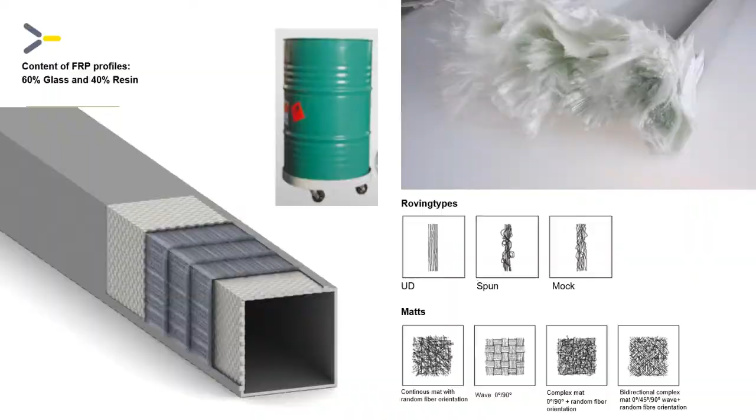At Fiberline Building Profiles, a profile consists of approximately 60% glass and 40% resin. The dry raw material is primarily glass, but it can also be carbon or aramide fibers. You can also use natural fibers such as wool and hemp. The wet material, or the resin material, can be either polyester, polyurethane, epoxy, or similar products.

If you look at the different glass types, UD is a unidirectional roving type and provides the strength in the longitudinal direction. The spun and the mock also provide strength mainly in the longitudinal direction, but also a bit in the transversal direction. The mats, seen at the bottom of the picture, are mechanically made, randomly oriented, continuous fibers. They have good all-round properties like transversal strength, stiffness, and bolt-bearing capacity, and give a high impact resistance.

All the construction profiles are produced with a surface veil for increased corrosion resistance, weather and UV resistance. The surface veil also improves the surface appearance.

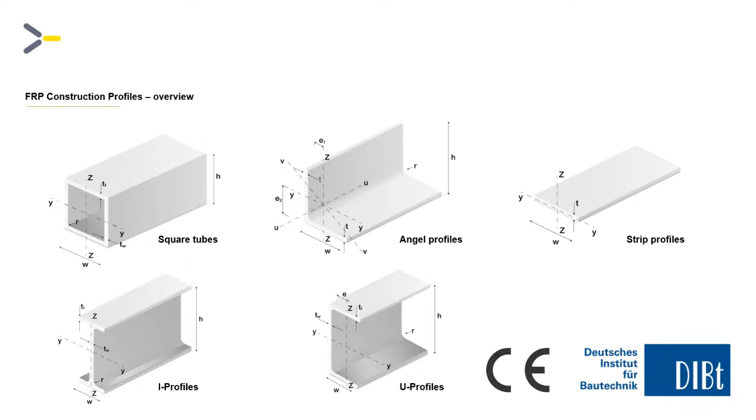You just need to log into the web shop, where you can also place an order 24/7. You can see your own order history if you are a customer here, save your favorites, and there are a lot more things you can do. If you're a new customer and working on a bigger project, you can also always contact our sales team before placing an order. Please use, if possible, our standard profiles as they are always in stock. Customized products and non-standard items have a minimum order volume that must be agreed with us before we start up the production.

But if you don't want to buy a complete bridge, we can also offer bridge decking planks, mainly for pedestrian and bicycle bridges. We keep the deckings in 6 and 13 meter stock. Planks can be supplied with anti-skid surface rated R10 to R13 according to the DIN norm, or a slip resistance value according to the EN norm. Planks are of course also available without anti-skid surface.

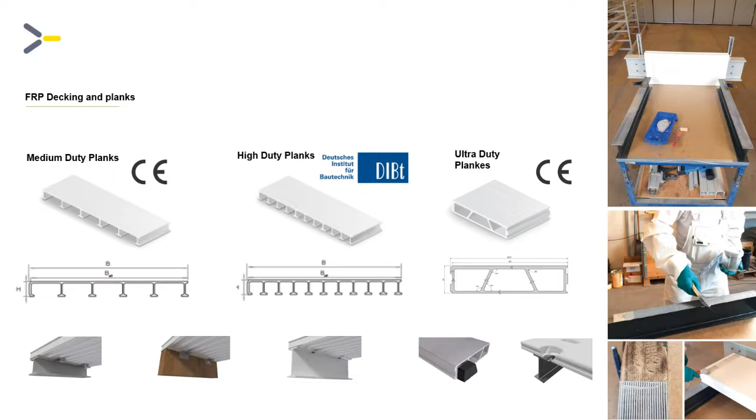In addition to all the construction profiles and planks, we also offer FRP gratings. For all our products, you can download brochures and load-bearing charts from our webpage. All the accessories here are also made in stainless steel.

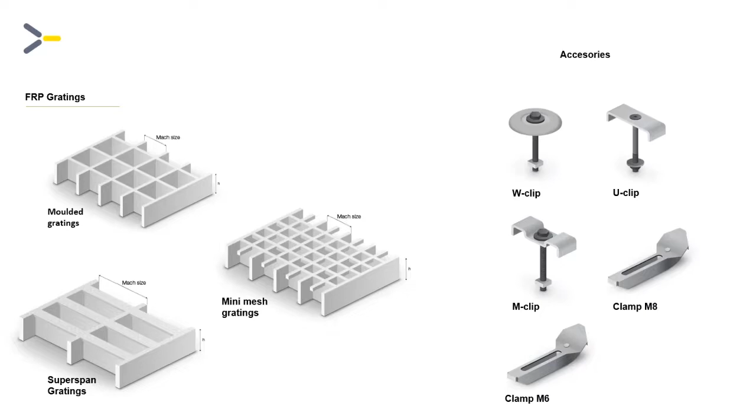Now we come to talk about different kinds of machining. Cutting. We can do the cutting for you, but if you want to cut the FRP profiles yourself, we recommend that you use a circular saw or a chop saw. We recommend the use of carbide or diamond tipped saw blades, and you can either use mobile or stationary systems.

Dust is not harmful from the cutting, not harmful to your body because of the size. However, we recommend that you use a face mask, hearing protection, and of course safety goggles. After work, you should wash your hands using only cold water, because the pores in your hands open up when you use warm water, and when the pores are open, small pieces of glass will get into the pores, which causes itching and irritation.

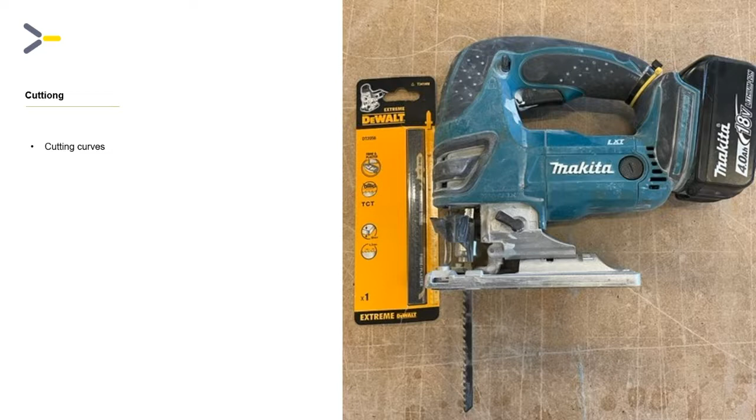A jigsaw equipped with a carbide saw blade for sheet metal work is very good for creating curves in the FRP profiles.

When we use our CNC machine for cutting, the optimal speed is approximately 60 to 80 millimeters per second, but a lower speed will of course reduce tool wear. For larger series, we recommend that you use diamond-tipped saw blades. We normally buy our cutting tools from a German supplier based near Frankfurt am Main, but I'm sure there are many other suppliers out there.

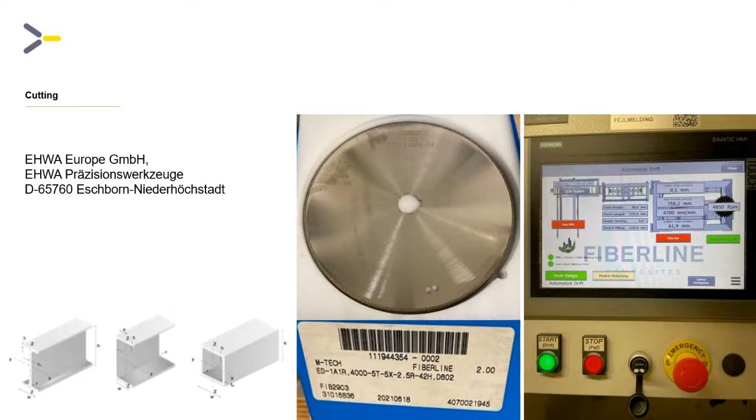Drilling. For smaller jobs, ordinary wood drill bits or hard metal drill bits can be used. For larger series, special drills or diamond tip drills are much better. We use normal machines such as cordless screwdrivers, but also column drills with a speed of between 1600, 3600 and 3900 revolutions per minute can be used. This speed gives of course burr-free holes on the top and on the bottom.

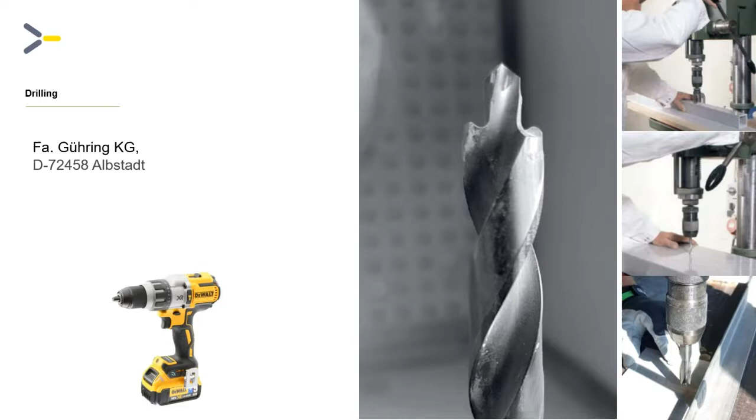We also use other different kinds of mobile drill machines, so you can probably just use the one that you already have in house for drilling.

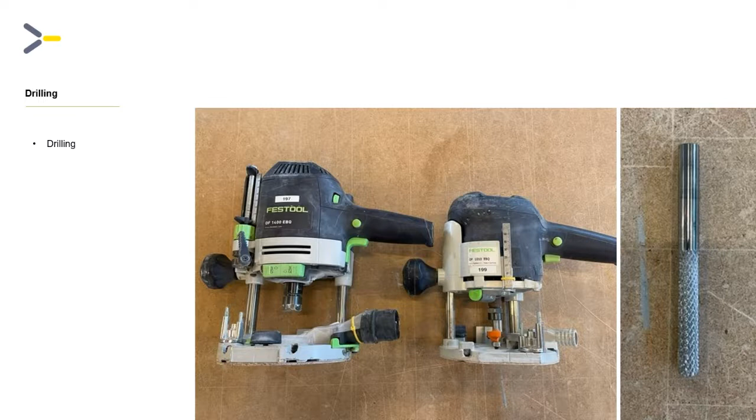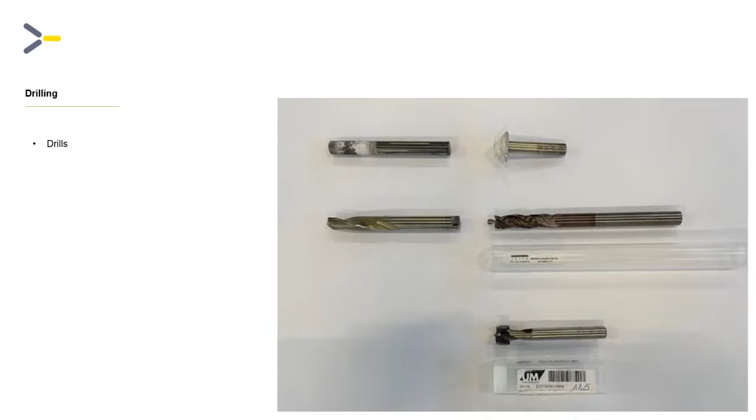For grinding the profiles after cutting, sandpaper or Scotch-Brite is suitable. A belt grinding machine with a high speed and a low feed rate is also perfect for larger series.

When we use our CNC machine for machining, for milling and drilling, we use carbide or diamond tipped tools. The rake angle should be between 5 and 15 degrees. Here you should pay attention to the feed rate. We use approximately 0.5 millimeter per revolution. Cutting speed up to 60 millimeters per second is optimal here. If we feed too much, the result will be worsened due to overheating of the material.

Punching the FRP profiles is also possible. A wall thickness up to 4 millimeters can be punched with normal carbide punches, but punched holes will shrink approximately 0.05 to 0.1 millimeter compared to the punch size. The cutting angle should also be flatter compared to steel, which leads to increased wear of the tool compared to steel. So punching is possible, but it's not the best solution.

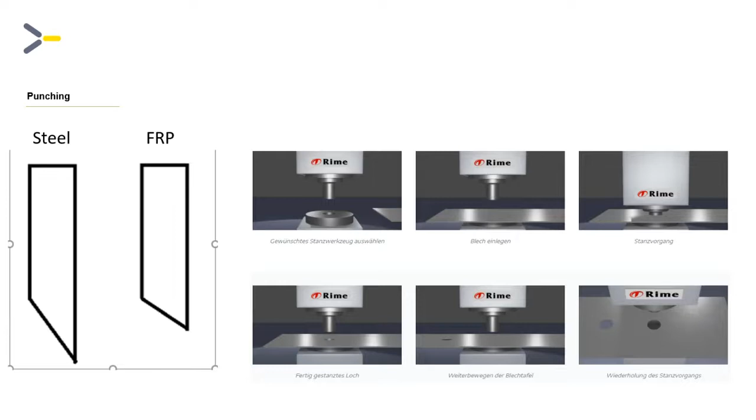Cut threads in FRP cannot withstand greater loads and are therefore not recommended. We have tried in many different ways, but the results have never been really good, so we recommend you use alternatives.

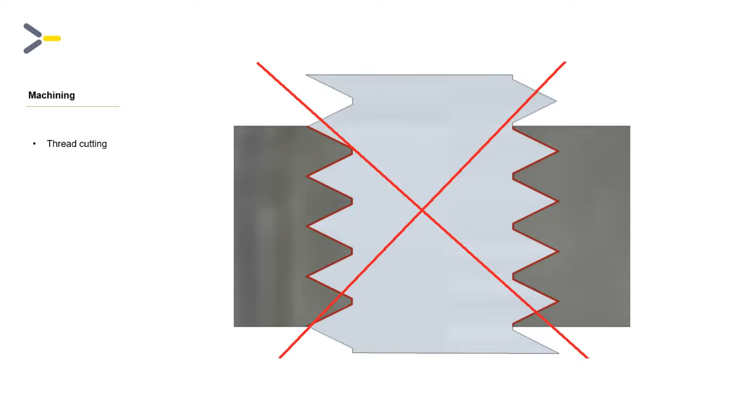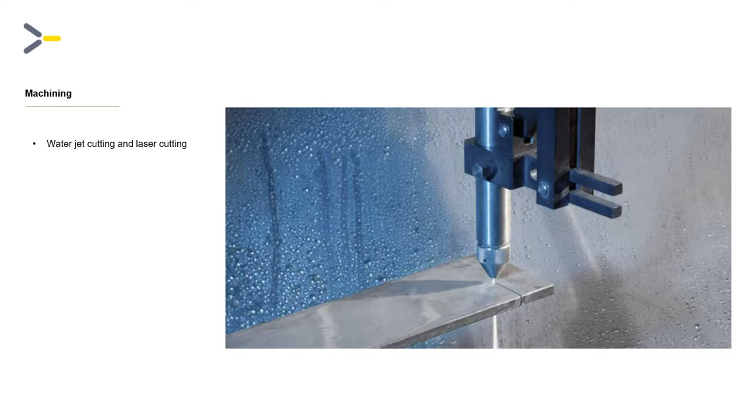Water jet cutting and laser cutting. Panels and solid profiles up to a wall thickness of 20 millimeters can be water jet cut. Laser cutting is also possible by using protective gas, could be argon. Pressure and speed must be much lower than for steel cutting.

Milling and turning. Carbide or diamond tipped tools should be used when turning and milling at the same time. The feed can be up to 0.5 millimeter per revolution and the speed up to 60 millimeter per second. The clamping angle of the cutting edge is between 10 and 15 degrees to achieve the best result. Depending on the tool, the cutting depth can be up to 10 millimeter. We learned in our own production that we get the best finish with rounded tool bits and either air cooling or liquid cooling.

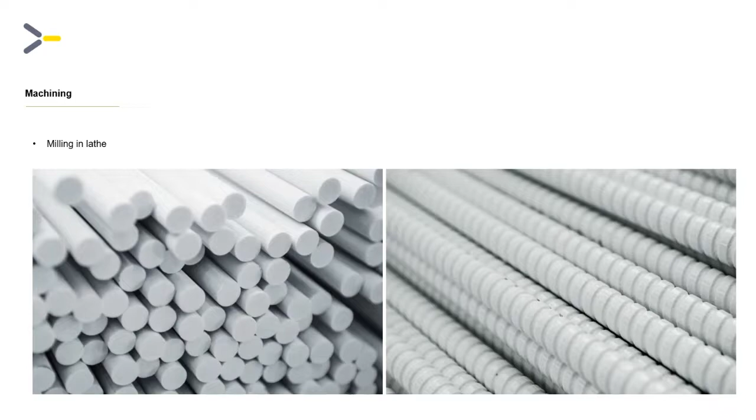Next we're going to talk about assembly. Bolted joints are used in many different applications, such as cooling towers, bridges, in the building industry, in the chemical industry, plant engineering, offshore installations, and of course railway platforms, stairs, and many more.

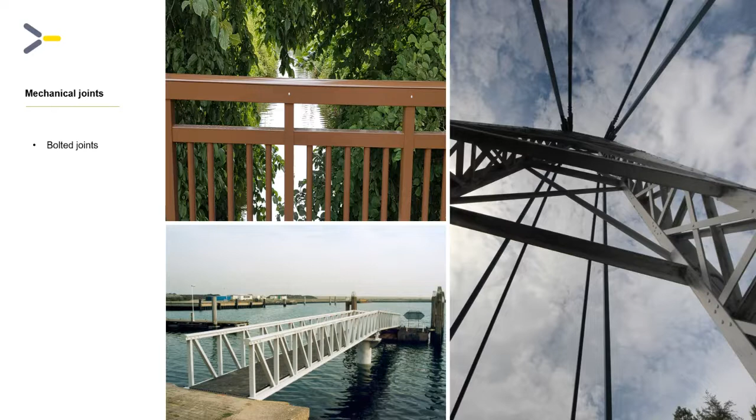In the near future, DB certificates will be required for assembled FRP profile constructions in Germany. However, there will still be a transition period for this. This will be regulated in the Deutsche Bahn standard and organized by the Academy for Railway Systems. In Denmark, we sometimes follow rules introduced elsewhere, but all load-bearing structures naturally require an approved calculation. It might be different from country to country, but you know best what the rules are in your own country.

Mechanical joints, machine screws and washers with self-locking nuts are recommended to be used here. If you want to dismantle screw connections, sleeves can also be used.

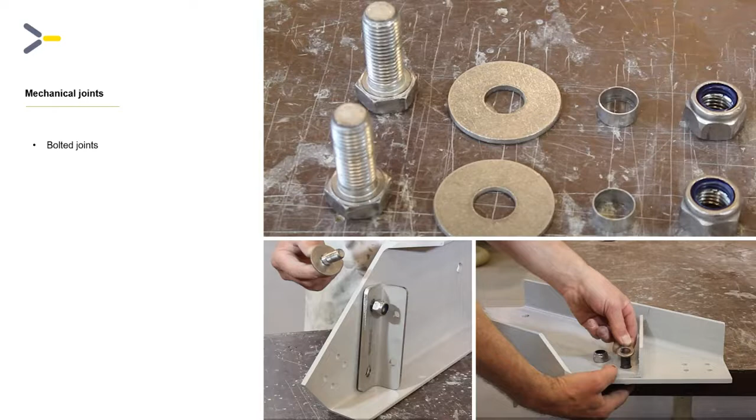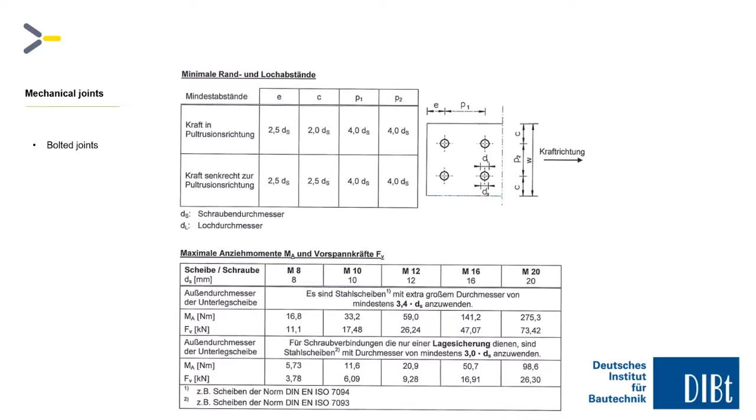This is a screenshot from our German approval where you can see the distances to the edge of the profile and the screw size, as well as tightening torque, regulated in the German type approval. You can also find the same information in our Fiberline design manual. All screw connections should be tightened after 24 hours. Please get back to us if you have any questions regarding where to place the hole and how to tighten the bolts and things like that. We will be glad to help you here.

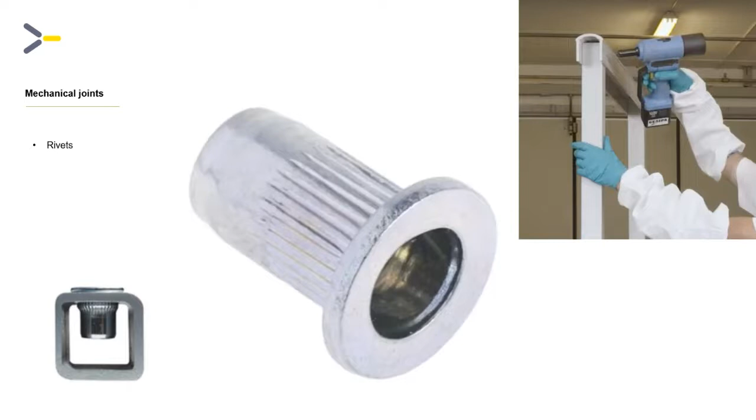Some mechanical joints and rivets, threaded insert sleeves and rivet connections are recommended for smaller wall thickness. However, rivet joints are also used to apply pressure for adhesive joints. When using rivets, please note the information provided by the rivet manufacturer with regards to drilling hole diameter and the tools required.

This is from an earlier test of a Bossard screw. Self-tapping screws can be used but cannot be untightened and tightened again. Here you see the maximal tightening torque is about 1 Newton meter with a 6.3 millimeter wide threaded screw. These values apply to this screw and may be different for different manufacturers.

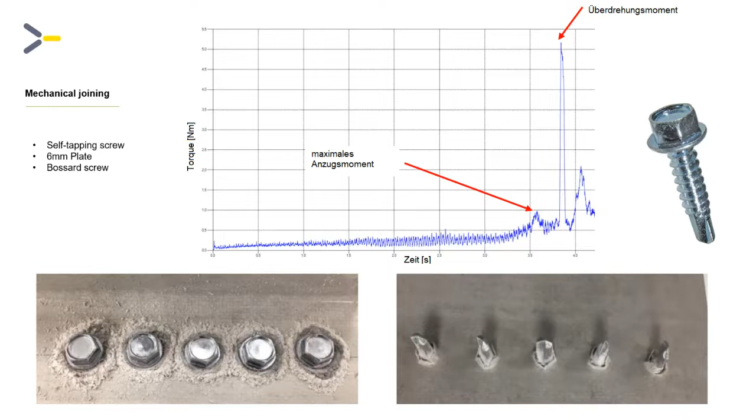I would like to use a bit more time on glued joints because glue has many advantages. It's easy to make aesthetic joints. Glued joints between profiles are typically more rigid than traditional bolted joints. Some types of glue are extremely strong, making it possible to limit the extent of contact areas. And glued joints subjected to dynamic loads perform well.

However, it's necessary to consider a number of conditions when using glued joints. A number of adhesive agents have properties that depend on time and are influenced by environmental factors such as humidity and the chemical composition of the air. Failure in glued joints takes place suddenly in contrast to bolted joints. The load-bearing capacity of glued joints is not proportional to the area which is glued. The load-bearing capacity of specific joints only increases with the glued area to a certain point, after which it remains constant. This condition is due to the fact that fracture is connected with a certain tension in the adhesive layer, typically in the transition from one profile to the other.

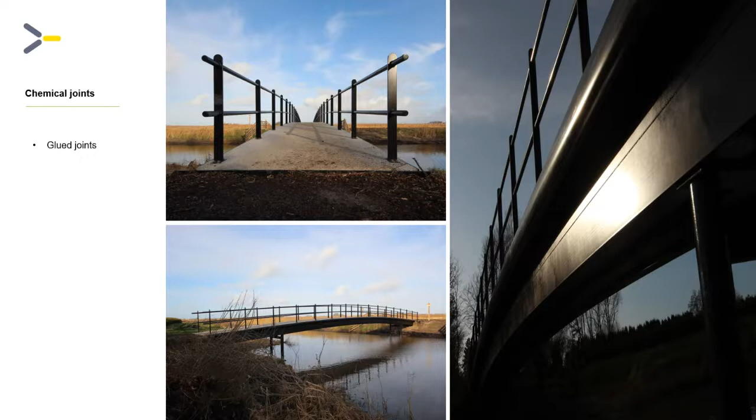On the next page, you can see all different kinds of glued joints.

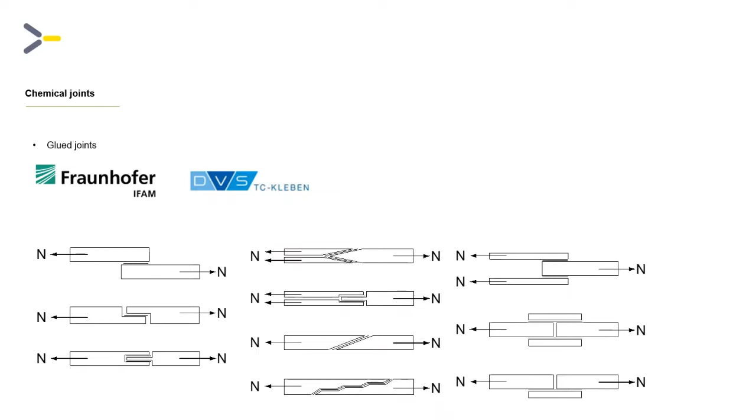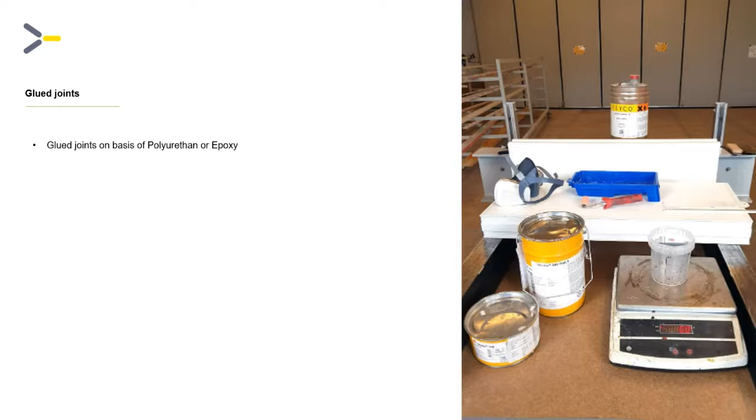For load-bearing structures, use a two-component epoxy or polyurethane glue, following the instructions made by the authorized supplier. Here you see some of the things you need to use for glued joints. Grinding and cleaning the surface is necessary as preparation before gluing the material together. It's important to follow the supplier's instructions and make sure the surroundings are good and the temperature is high enough. Apply the glue with a filling knife or a roll. Put the two parts together and apply pressure on the joint using a sandbag or other heavy object.

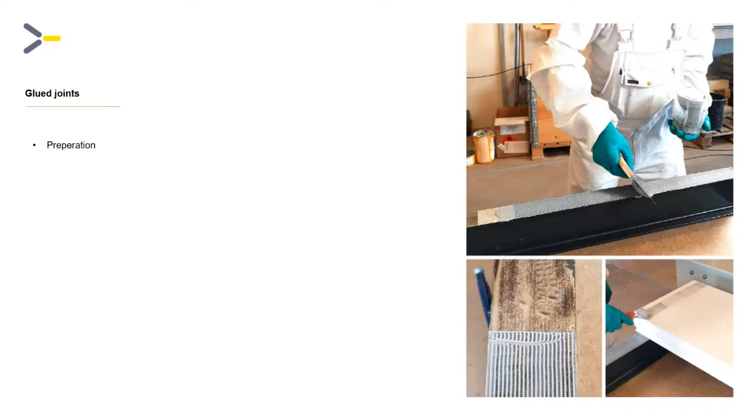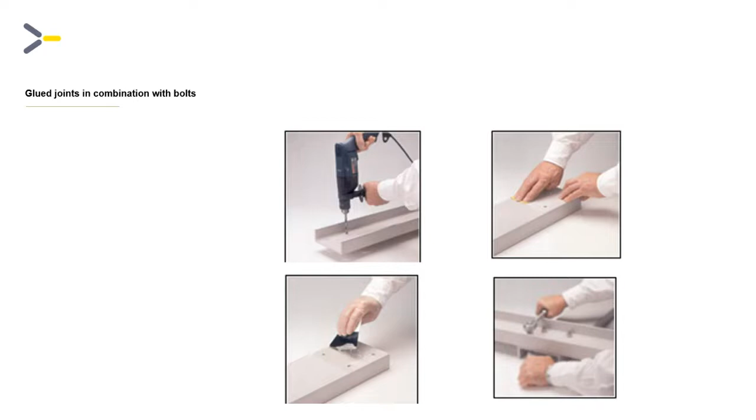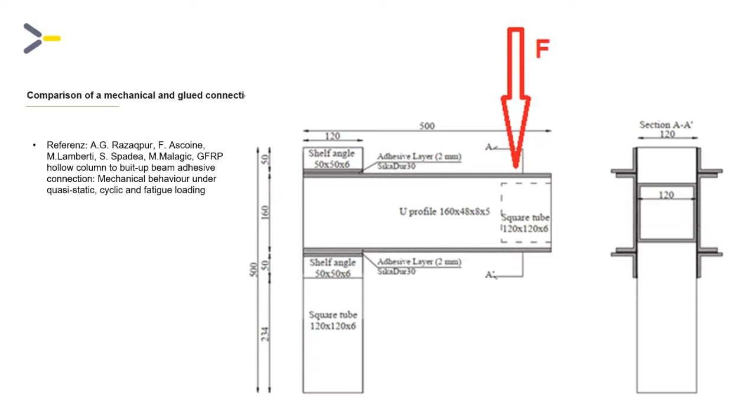On the next few slides, I'll show you a comparison between a mechanical and a glued connection and the failure of the two different connections. On this slide, you can see the schematic presentation of the test setup of a cantilever with a load introduction.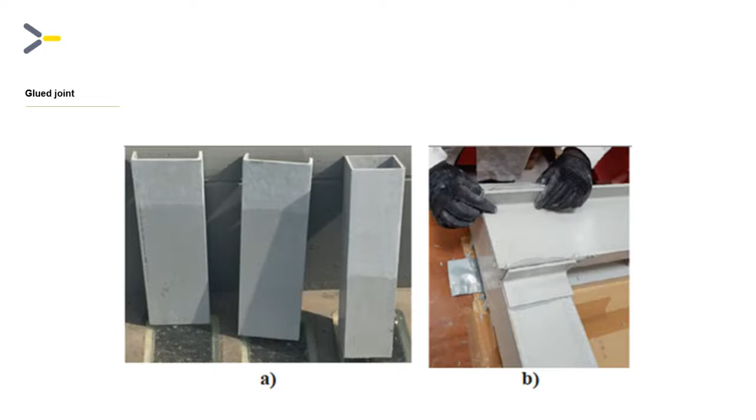Here you can see the individual profiles were glued according to the specifications of the manufacturer Sikadur. In this case, we used a two-component epoxy adhesive, Sikadur 330. On the left side, you can see the glued connections, and for comparison, the test setup on the right side was a pure screw connection.

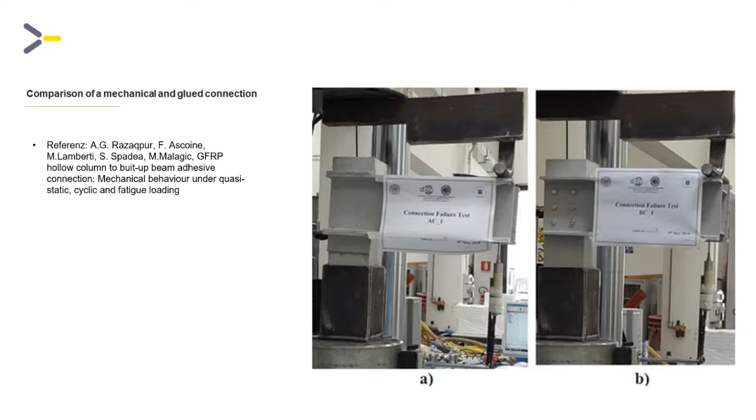With the glued connection, we get an interlaminar shear failure in the FRP profile and not in the adhesive. For the bolted connection, a bearing failure can be seen in the screw connections. It might be difficult to see in the small picture, but down to the left you can see the direction in which the hole was broken.

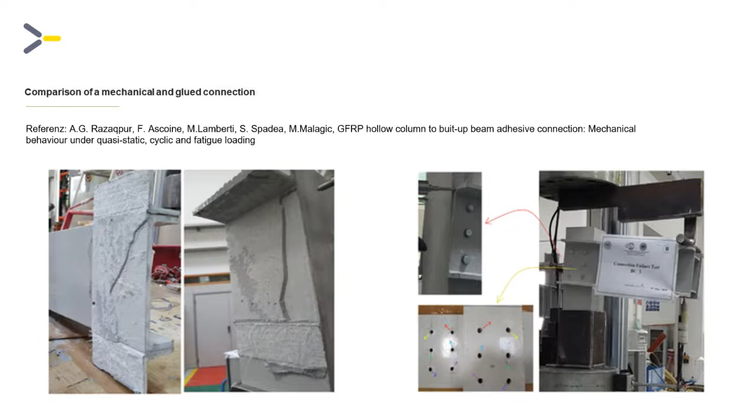Here's a test made between two bridges, and the failure moment of the bonded joint was 33.5% of the maximum moment capacity of the beam. This value is at least 80% higher than any other compound tested in the past.

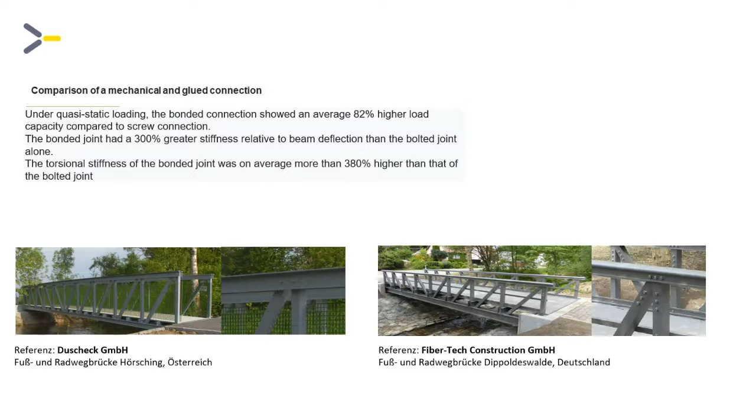Now we're going to talk a bit about painting the profiles. Due to weather changes, the surface of the profiles can become rough over time, making it easier for dirt to settle on the surface of the profiles and affecting the aesthetics of the construction.

All our FRP profiles and planks have a surface polyester mat with a thickness of 0.4 millimeters, which keeps the main supporting fibers, in this case the mats, away from the surface. The main supporting fibers are therefore not attacked and the mechanical properties remain intact. It is recommended to use a color coating of 60 microns dry.

The coating system will not affect the durability, but rather ensure the attractiveness of the profiles for decades.

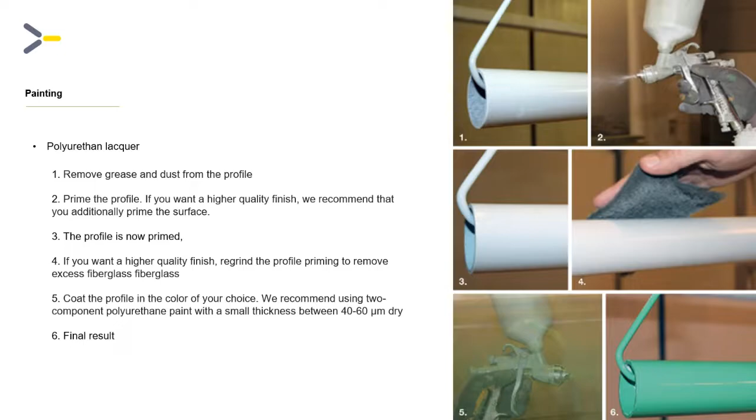Now, a bit about repairment of constructions. The profiles can be cleaned with ordinary cleaning agents. You can also use a high pressure cleaner, but don't go too close to the profiles, otherwise you will damage the surface. Bolt joints can be inspected visually and possibly retightened if needed.

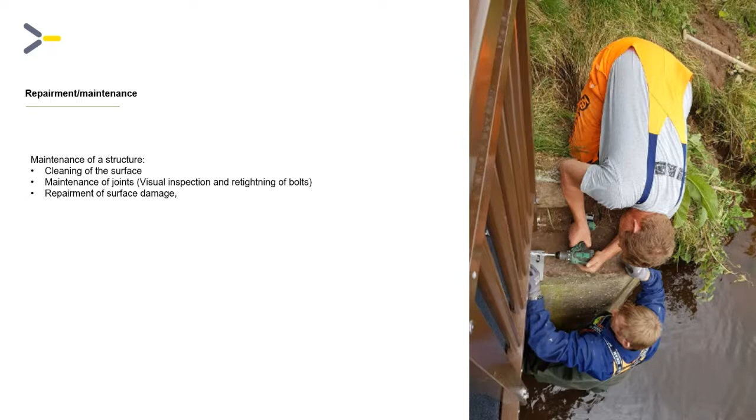If it's necessary to repair parts of the construction, we recommend you contact us or any other designer, FRP engineer, or FRP supplier. In the picture, you can see what equipment you need to perform a minor surface repair. How to do the surface repair will be shown on the next slide.

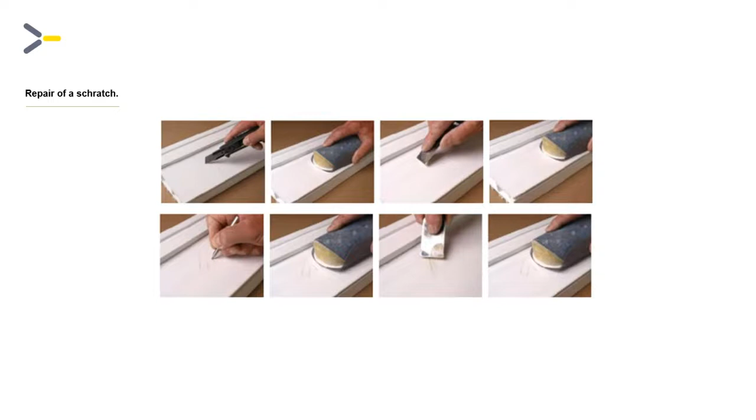It's a repair of a scratch. You can grind the surface with sandpaper 180. You can fill the scratch with a suitable filler, could be Sikadur 330, and then again grind the dry surface with sandpaper 240. The profile is now ready for painting.

If you want to repair a hole in the profile, you need to drill a hole with a cone drill and make a cone and align the cone with the hole. Glue the cone into the hole, but make sure that the cone is slightly below the surface of the profile. Then you can fill up the hole with a suitable filler. Grind the connections with sandpaper 240, and then again it's ready for painting.

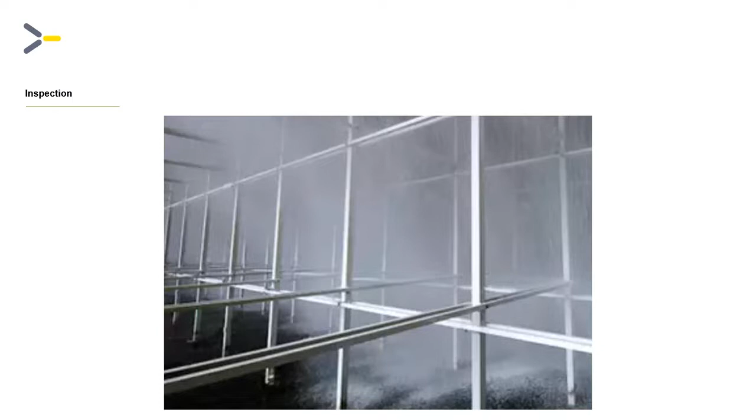Inspections. Inspections can be performed visually. This is inside a cooling tower, so you might turn off the systems before a visual inspection. In this visual inspection, you can check the surfaces of the profiles. You can see if there's any deformations, have there been any vandalism, accidents, or delamination, or other things like that. Bolt joints must be retightened according to the instructions, and there may be some special regional requirements. I do not know them, but I'm sure you know them where you live.